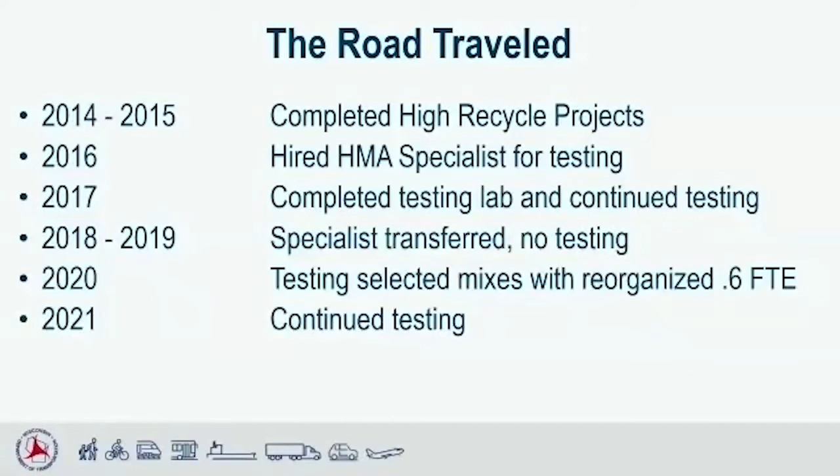Some of our research projects that we have going on, obviously, we're also with the cracking group with the NCAT and MnROAD, and we're involved in NRRA with MnROAD and stuff. So we've got a lot of groups that we're teaming with to learn more about the cracking and other performance tests. But we did have a project back in 2016, the end of it, Dr. Bonnequist came up with looking at our different performance characteristics of our mixes, and I-FIT had just come out and he used the post-peak analysis and it really made the data work a lot better. So that was a big help.

We had another project where we were looking at different performance tests. Dr. Bahia and the UW group found out that the 50 degrees for the Hamburg wheel did not work for our 58-28 mixes. So that's one thing, we dropped that down to 46 degrees.

And the next one NCAT did for us, the regressing air voids. And at that time, Wisconsin was realizing we don't get enough asphalt in our mixes. They're too brittle. One of the regions actually said, we're going to try to fix this on our own. And they used an effective binder spec. We worked together with industry. Industry came up and said, hey, let's try regressing air voids. Other states are doing it.

We actually regressed down to 3.0 voids. And that got another 3 to 4 tenths of virgin binder into our mixes. And all the testing that we've done has been on the regressed air voids.

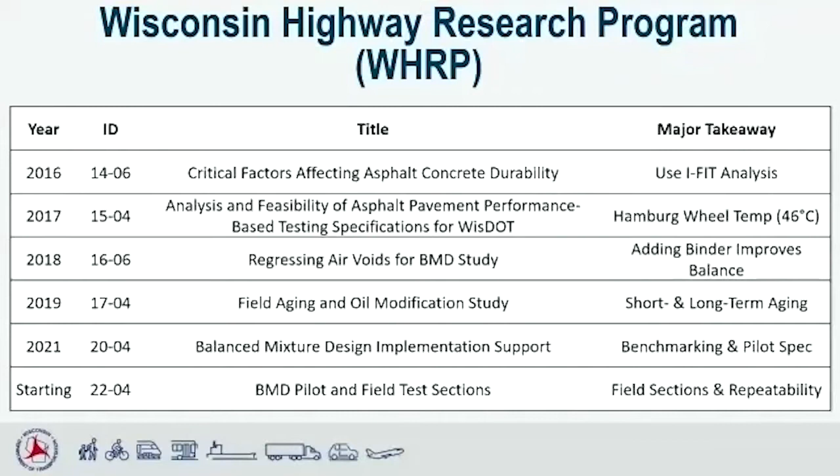And this last one that we're just starting is pretty exciting for us because we are doing some of the things Randy talked about earlier. This is an NCAT project they're doing for us, and we're doing a field test section where we're going to have multiple sections where the upper layer is different materials. It's the same mix design, but adjusted to have varying levels of cracking and rutting performance. And also we're going to do a bunch of jobs where we're going to take those 10 consecutive tests and go, how does this vary during production? If we change something during production, will it affect the results for our test?

So which test? Everybody's semi-nightmare. We went with rutting test with the Hamburg wheel tracker. We're sticking with that so far. Cracking, we've been kind of through the gamut with some SCB testing, and they didn't really pan out the way we wanted to when we found out the post-peak analysis was better. We did do some DCT, and right now that's kind of parked.

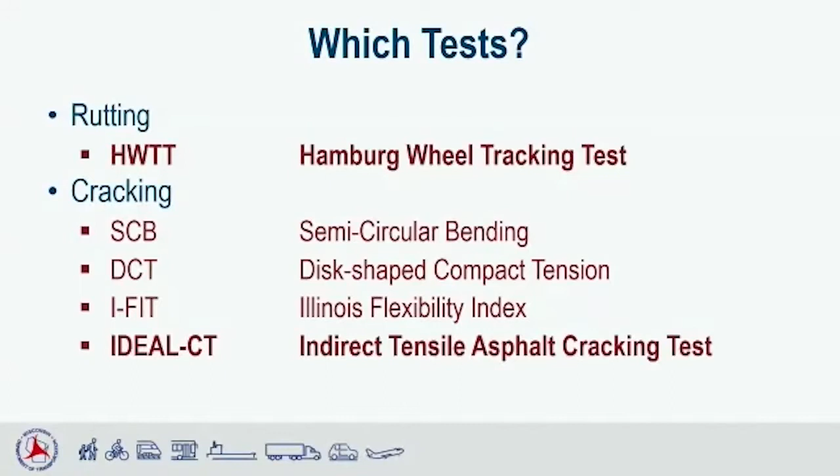Of course, thermal cracking is important to us up in Wisconsin, but we have made some binder changes to help that. The I-FIT is what we started doing, and then we pushed the easy button with the IDEAL-CT and said it's basically a similar process. So that's what we've been testing the last 2 years with, IDEAL-CT.

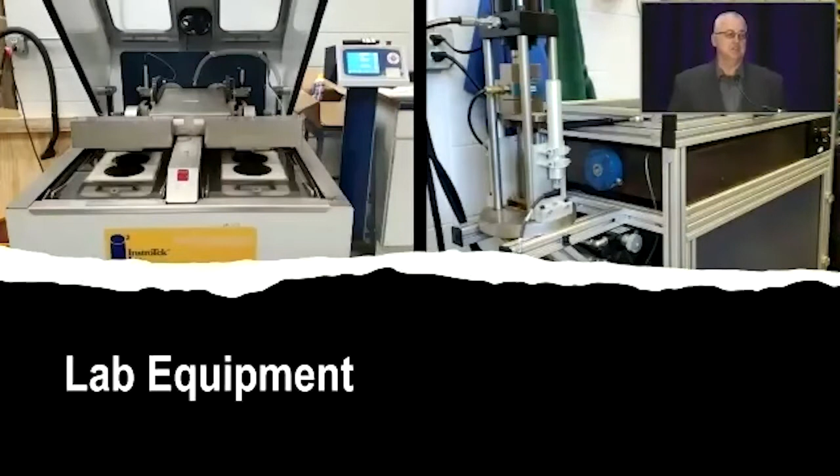And we had to set up our lab. We had the Hamburg wheel tracker equipment, and then we also have an Instrotek chamber, so with a horizontal jig we can run DCT and other tests, temperature controlled there, and we also have the vertical jig that we can do our IDEAL-CT, our room temperature testing at.

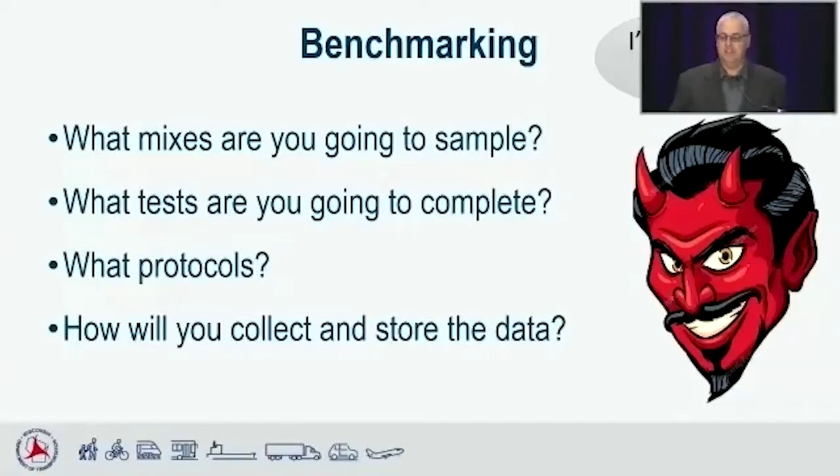So as we go to benchmarking, a lot of details, devil's in the details, as they say. So here we are. What mixes are we going to sample? What tests are we going to complete? What protocols are we going to use? How do you collect and store the data? We've had to go through a lot of those issues the last couple of years.

So we did test in 2017, and then again last year, and we're continuing this year. This is just a breakdown based on traffic level, our low traffic, medium traffic, high traffic, and also SMA that we use on some of our interstates. We're trying to push that more now. And you can see MT is our workhorse. We've got most of those mixes there.

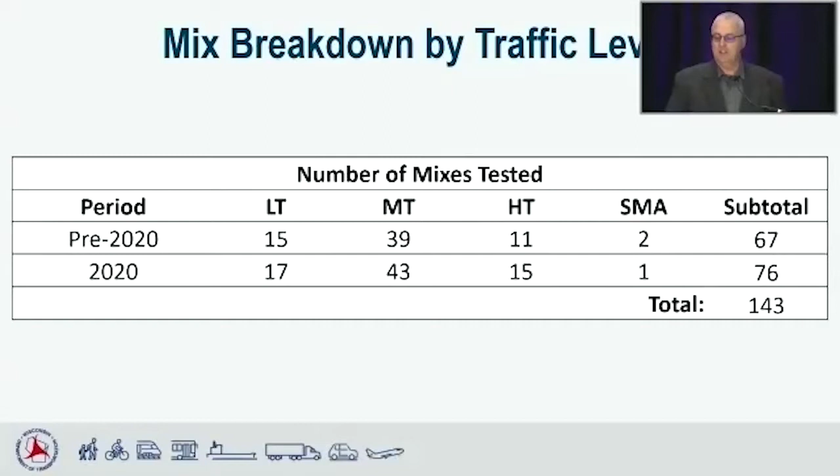And as we break down those 2020 mixes, you can see not only the traffic level, but also the binder modification level. It's the M332 designation, so it's standard and heavy, very heavy, extreme binder grades. And you can see we've got the S grades covered pretty well, especially the MT, but we need to make sure we fill in those other data so we can understand the performance gain we're getting with other modifications.

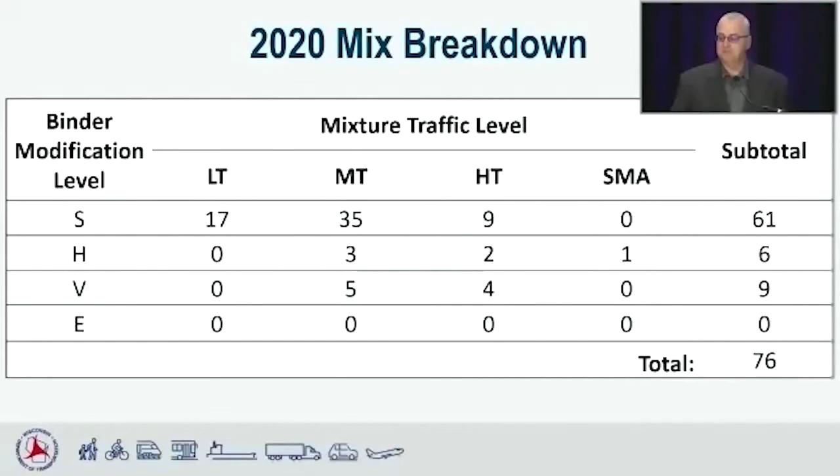So the mixes we benchmark were primarily from our PWL projects. We have PWL as our highest level quality. It actually has a test strip, so we know we get the mix dialed in. We go a couple days, the mix is going good, and then we'll go out there and sample it. Our contractor partners are out there sampling a bunch of boxes for us and for them.

We also locate those samples. So we know by a northbound lane at these coordinates, that's where this sample test is located. So hopefully we can get that long-term performance tied down, because we don't really have any of that now, but at least we'll have some references in the future. We are also trying to key on other select mixes, like I said, SMAs, interlayers, and try to get more mixes with polymer so we can help fill that data set up.

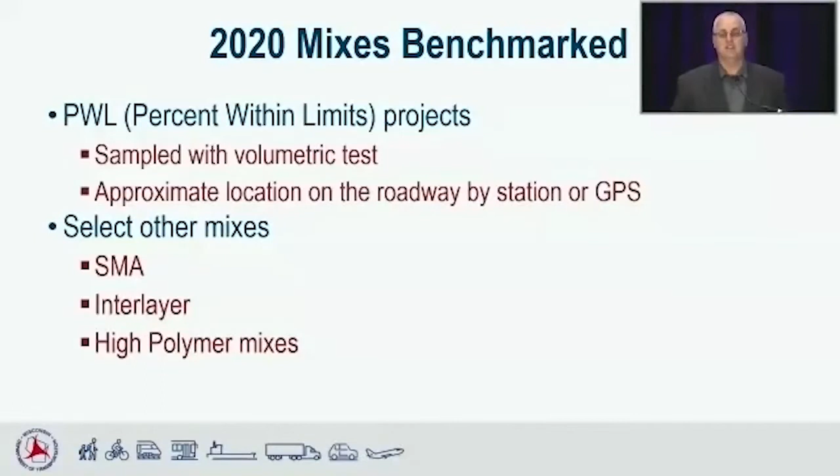So as far as the tests, when we get those splits from the contractor, the regions are grabbing them for us and sending them to the central office. That's the only place that the department's doing any performance testing. We have the Hamburg wheel, so we're running only plant mix basically right now, with no additional aging for Hamburg wheel, whereas the IDEAL-CT, we are doing additional aging at 135C for 6 hours.

That's what we're doing right now, hopefully to vet out the aging of the binder, especially if recycling agents come to be. We've also done some without the additional 6 hours of aging. We want to get that comparison. We understand a lot of states are looking at just the plant mix or short-term aged mix to use that more easily for production testing. So we are looking at that.

So keep that in mind as you look into our numbers. There's some numbers that are over 50 typically, and they might be just plant aged or short-term aged materials. Our minimum ones are below 50, and that's why our levels are lower, or half as much as what you saw yesterday.

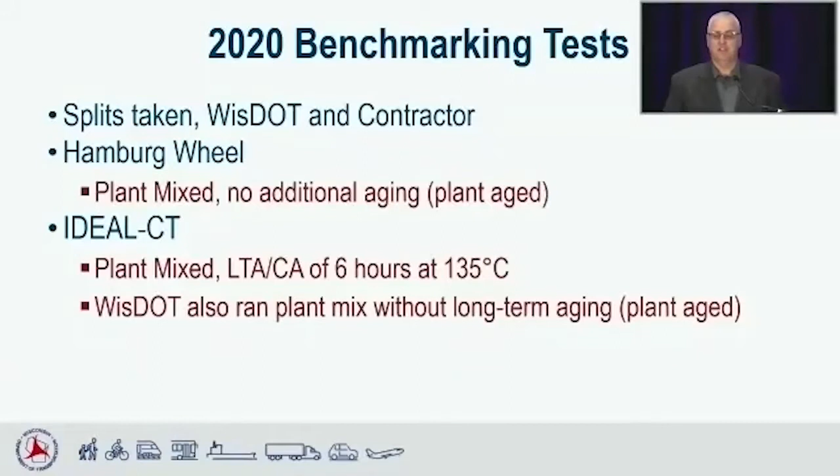So the database, it's quite a thing to look at once you get all the numbers in there, and you're always wanting to add more columns, but it takes a lot to get the DOT and contractor data in there. You've got to identify the test and the testing conditions. And we're also adding some automated analysis to it, so we can get our averages and standard deviations out of it. We're plotting histograms and doing those cumulative distribution plots, S curves that we saw in the research that NCAT did for us. So they're coming in pretty handy.

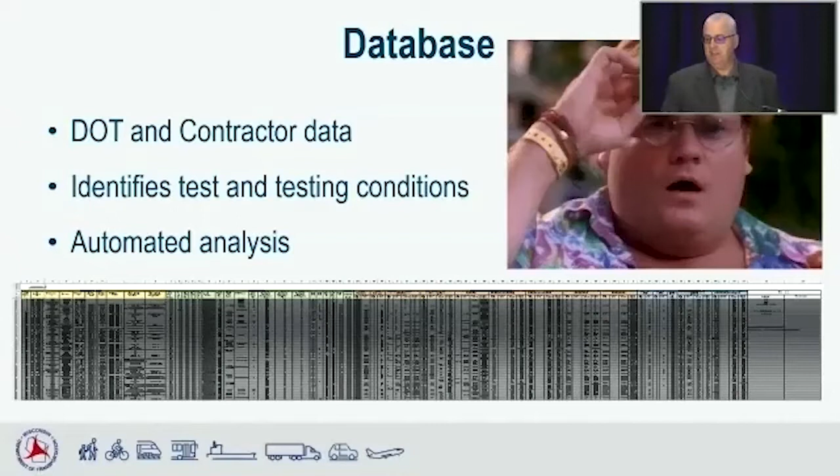So the database right now has 51 columns, a lot of project info, like the county the project's in, information on the location of the test, the mix info, the gradation and the type of binder and such, and other properties too, like the aggregate type and the source also. We also have the Hamburg wheel tracking info and results, and the IDEAL-CT info and results. Our old database actually had all those other tests we were trying. So the current one is cleaned down to just these tests.

And of course, a comments section in case the testing was part of another NCHRP project or something we've had in the past. We are trying to make it simpler. We're going to start implementing a form for the contractors to put all their information in for their testing. They can send it to us and we can auto-populate our database with it. And then we can easily compare our test to the contractor's test.

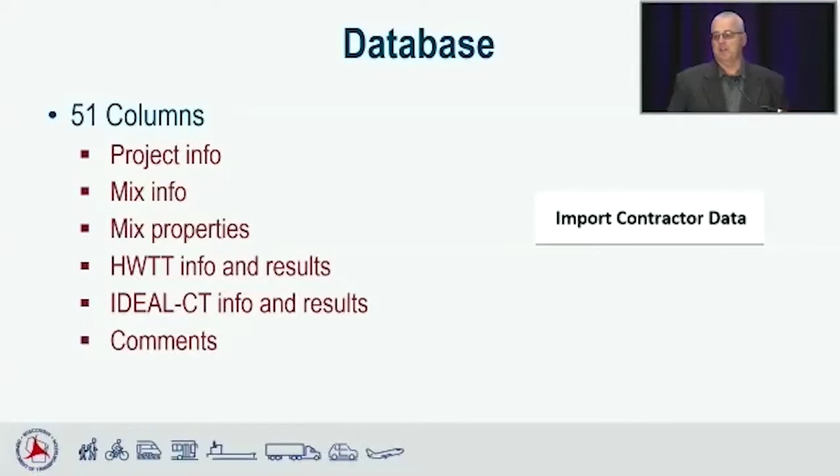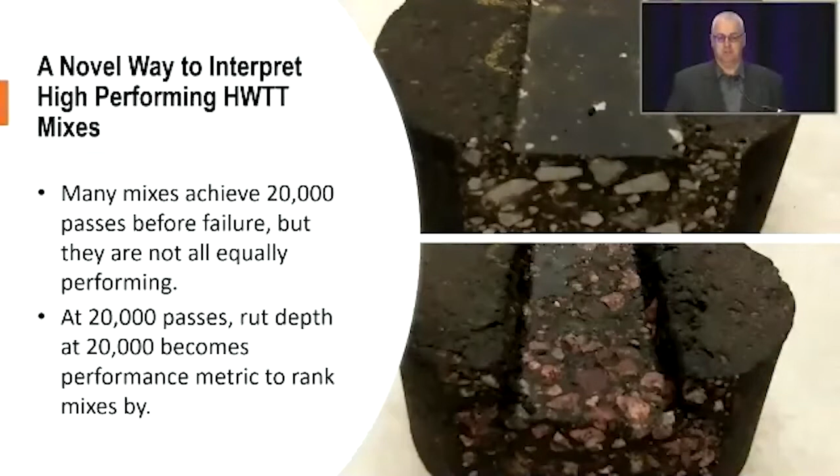One way when we're looking at Hamburg wheels is you're always looking at the number of passes or maybe the rut depth if it exceeds the 20,000. And we've got the full gamut of the degrees of rutting. So what I asked our staff to look at is drawing out that bottom axis. So it's actually two axes in one.

We've got the Hamburg wheel passes, from 0 to 20,000. And for those mixes that do make the 20,000 passes, we've added more of a continuum of the scale. It's very simple. All we did is add another 1,000 passes for every millimeter rut depth to be below 12.5. So I hope that doesn't upset the scientist in you, but it actually works pretty good because now we can see the continuum of the test and the spread of rutting resistance that we really have.

Initially, we were looking at like a 40 CT index. As you can see, there's a lot of mixes below that. And remember the CT index is the plant mix plus the 6 hours of 135 aging. And the Hamburg wheel is only plant mixed or short-term aged. So there is a considerable amount of concern for our cracking resistance. And there is some concern.

We had one H binder that we would have liked to see make 15,000 passes. It didn't, and several of the low traffic mixes are the S binder mixes that did not meet that line. So that's the ones we looked at, but you can see we kind of got that continuum from the upper left to the lower right. And the sweet spot is upper right, which is where we want all of our mixes if possible.

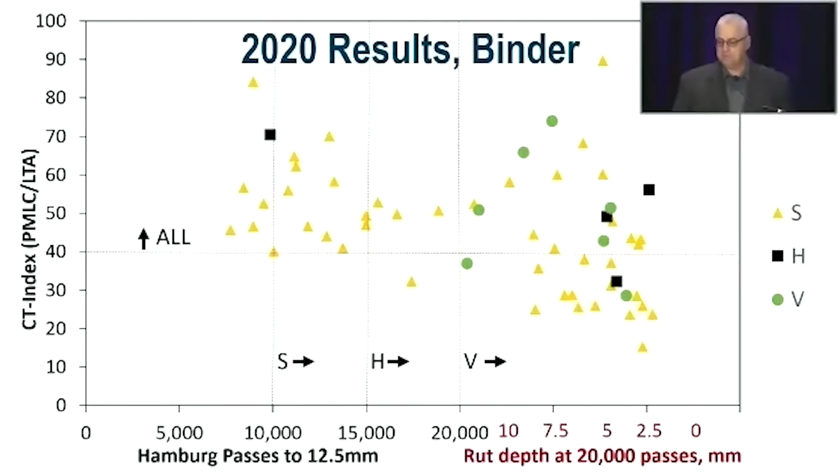This is the same thing, only instead of using binder grade to get the different thresholds for Hamburg wheel, we're actually using our traffic levels. Hamburg wheel trends much better with binder than it does with the traffic level, especially in our case where we have areas in the state where we have outstanding aggregate structure.

And so those LTs and MTs, the same aggregate is used as HT, so they can perform very well all the way along the continuum. So that's why they're spread out. Our HTs are up there where they belong though.

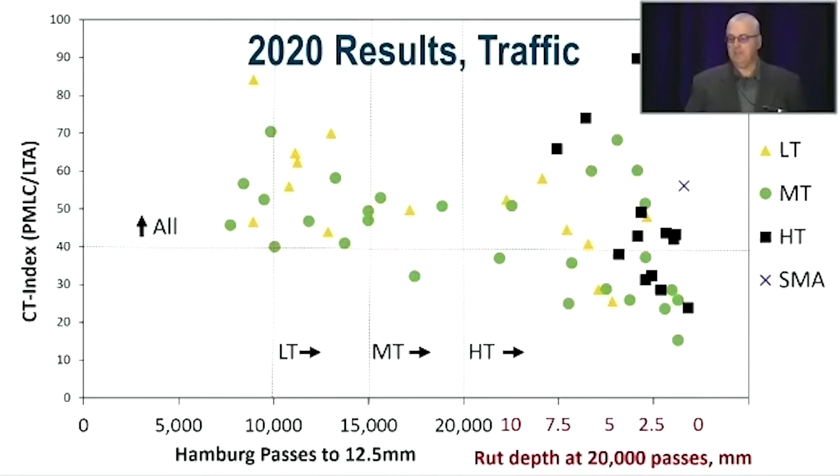So we did set up a pilot special provision. We're going to try to get it on all 5 of our regions completed by next year. So we're only going to do 5, kind of just sticking our toe in the water. We are definitely taking baby steps. When you're in DOT for 36 years, you tend to be pretty conservative. And so we're taking steps to move toward it. We have Hamburg wheel and the IDEAL CT in the pilot spec.

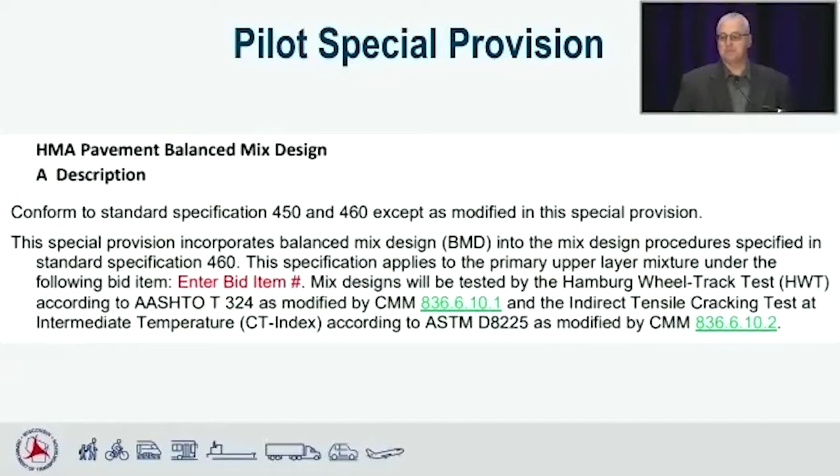And the criteria we used was similar to what you saw there, the 10, the 15, and the 20,000 for the S, H, and V binders, and the E also. And we have the IDEAL CT. We're looking at using 30 at first to try to capture our worst cracking susceptible mixes. And we also added in the stripping inflection point of 8,000.

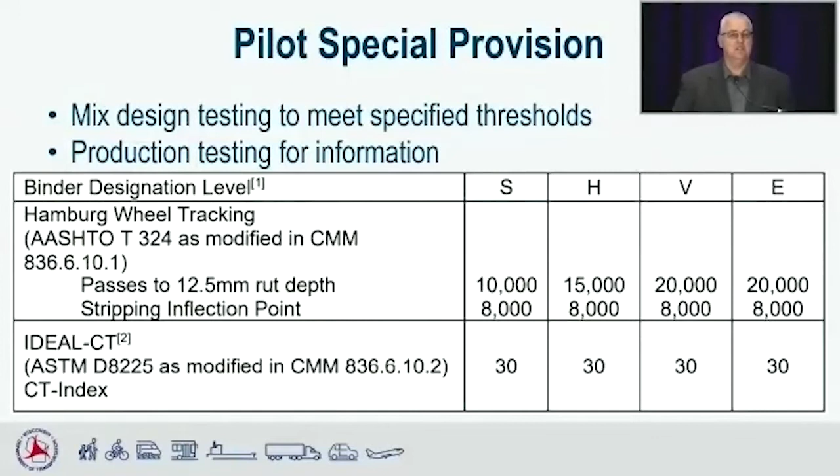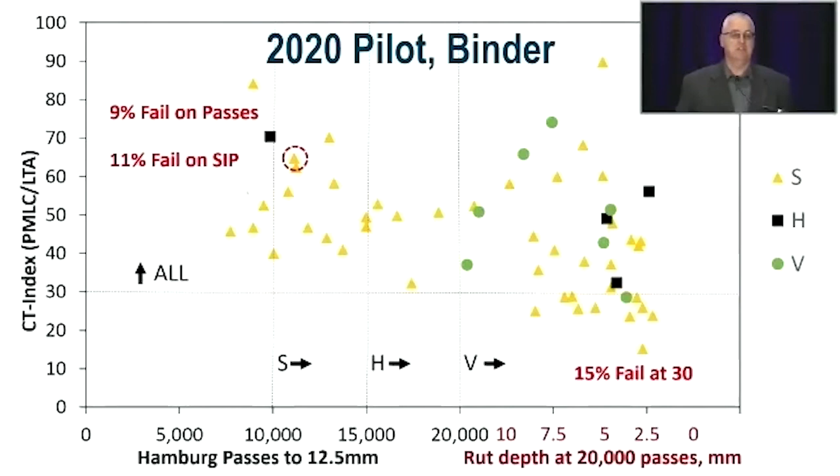So we're going to see if that tells us anything more, and try to understand, is our rutting problem, our concern, really a stripping problem? And it very well might be, because several of these mixes are in an area where we know we have stripping aggregates in that part of the state.

So we might have more of a stripping problem, and we definitely have a cracking problem. It was good to have all these points and to get a good big picture view of them. And remember, this is all data after we regressed our air voids to 3%. So if we would have done our 4% mixes, I'm sure we would have had more of them that would have been down and to the right and more cracking susceptible.

So those are the results of starting our benchmarking efforts. We're trying to keep things going. We realize, with Randy's list that they've been working on with the FHWA, we're going to look at that closer this coming fall and winter, to see what steps we need to take. But we need to do a lot more analysis on this data to try to get where we're at, and a lot more data points too, especially in those modified areas.

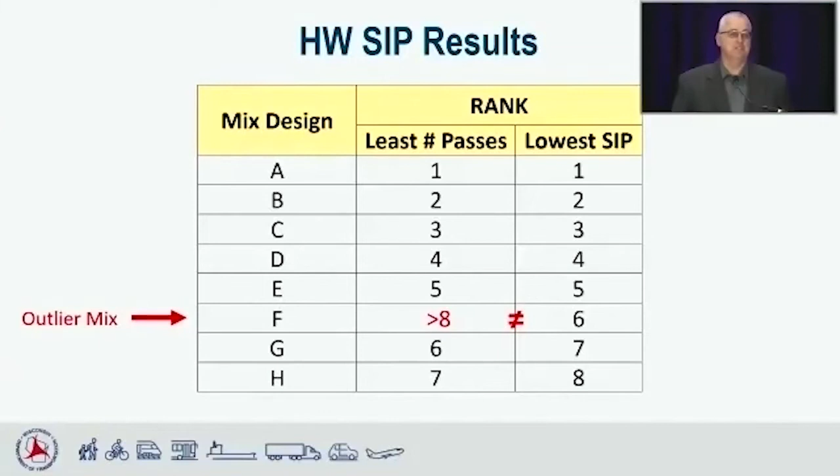That was some great stuff you had there. And one of the things that I think was really key, and it was in the data, is that you regressed your air voids. So now you have that little bit higher binder content than you normally would have in the past. There's been a lot of discussion about putting polymers in and these tests identifying the improvement with polymers. But there's a catch to that. You have to have enough binder in the first place. So if I don't have enough binder, I can put the best binder in the world, it's still going to crack. So I think some of your data clearly shows that it's a combination of both.

I've got to have a good binder and enough of it. And it's the one that you're always balancing. I can take a crappy binder and put more of it in, I'm going to get better cracking. But maybe if I had a really high quality polymer modified binder, I'd get even superior, but I can get both. And I think your data goes a good first step to show really that key thing there.

Thanks. Yeah, clearly we've had some data to the right that was very rut resistant, but some was very elevated. So we know that we're getting good crack resistance to it. So we've really got to identify what's going on with that material that it was so elevated in cracking resistance.